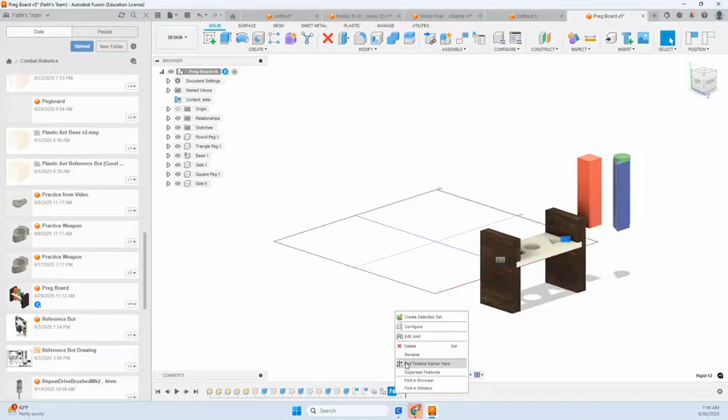So I have here my parts: my base, my square peg, my triangle peg, my round peg. I'm going to delete this so you can see me make the second side. I want to make sure that my base is grounded. If I right click, it should say ground to parent, but I don't want to unground it. I want it to stay grounded, so that means it's not moving.

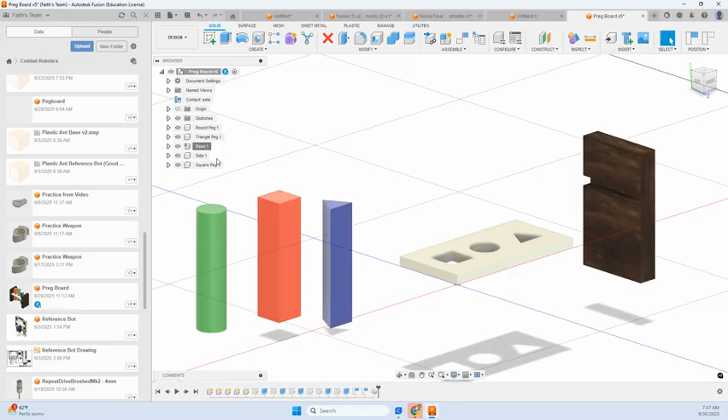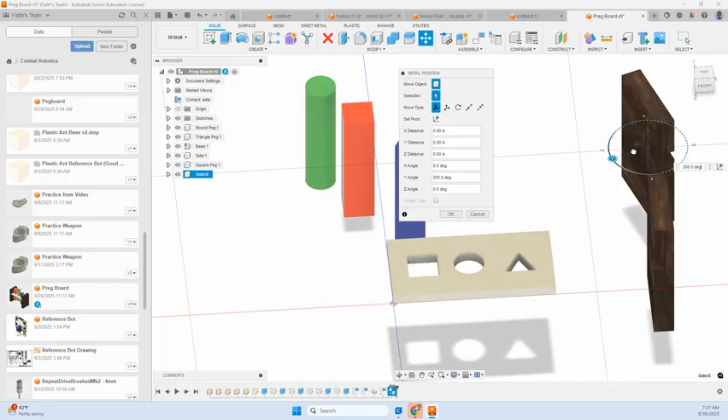I'm going to make a copy of this side by right clicking, copy, and then right click, paste, capture position. Then I'm going to move this over, and then rotate it 180 so it's the right direction. Okay, so now I have this part and that part, the two sides.

So I want to do a rigid joint so that this is permanently attached without moving. In the assemble menu, here's the joints. I'm going to click joint, and in motion, I want it to be rigid.

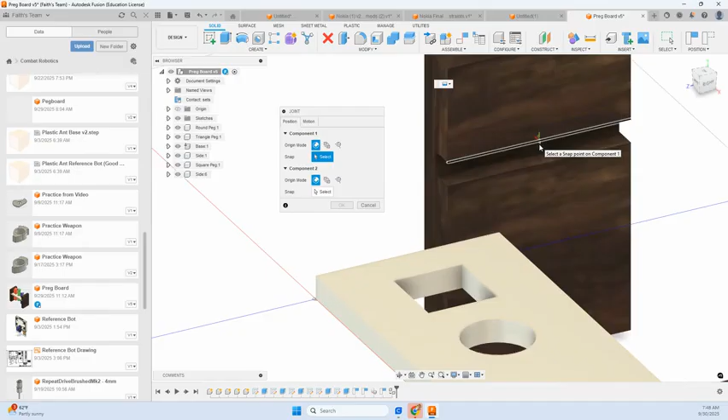I'm going to go into this, but I might need to rotate around so it's right in the middle on this inside part. Can you tell which part I'm in? Right there, see that it's like the back of that slot where it's going to sit. Then I'm going to click, select the second one, which is right here.

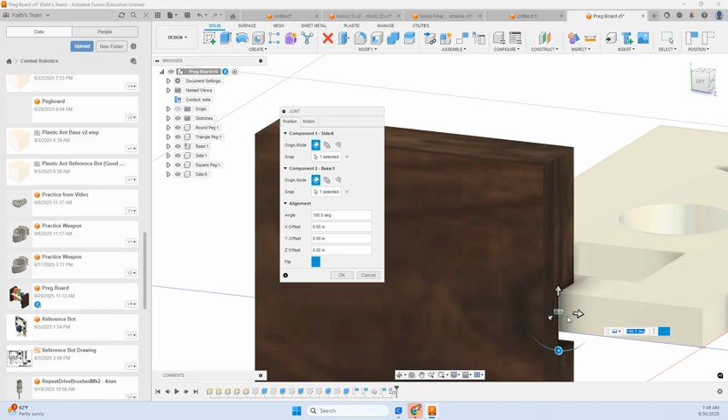No, that didn't work. Let me try that again. So I'm going to do assemble, joint, and I want the middle of this and the middle of this side. There, just make sure you select the middle of each so it's in the right spot. Notice it's rigid, so it won't move. I'll push OK.

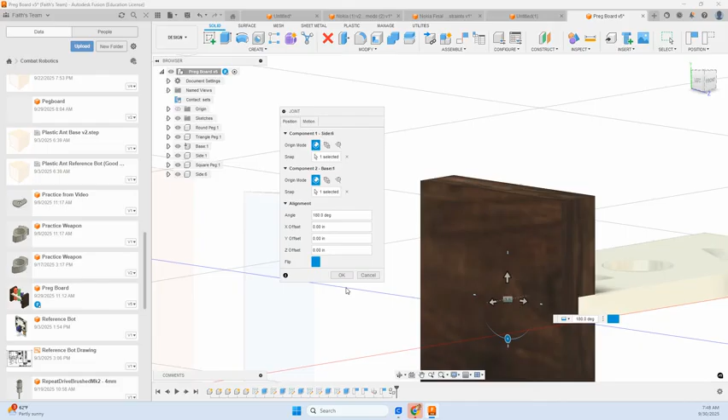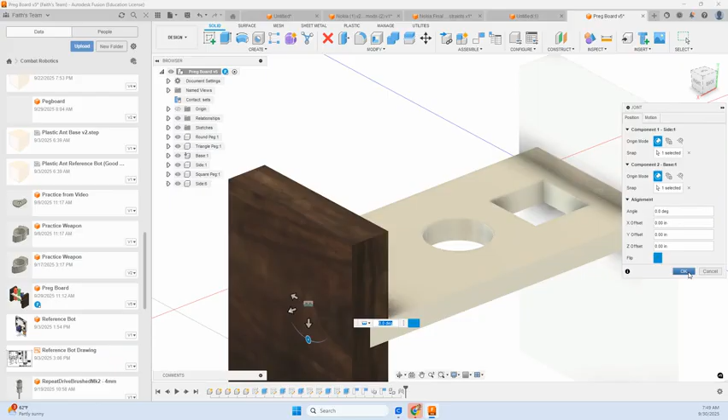Then I'm going to do another joint, assemble joint. Nope, that's not right. So I'm going to select the same spot on this one, and then this other side of the side right here. Okay, so now those are permanently attached.

Now I want to put this in the slot and make it go up and down. Let's do triangle first. I'm going to go from this view. So triangle, rectangle, circle. I'm going to go assemble joint, but this time I'm going to do slider.

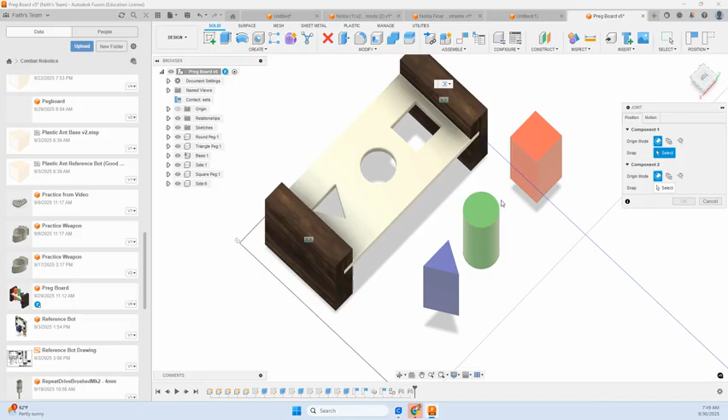I'm going to first select the edges I want to connect. I want to connect the top edge of this to this edge here. I'm going to click this and this. Now I'm going to go to motion, and you can see what the motion is.

So that doesn't look right. I'm going to switch the axis, maybe this one. Yep. So you can also limit the min and max of it.

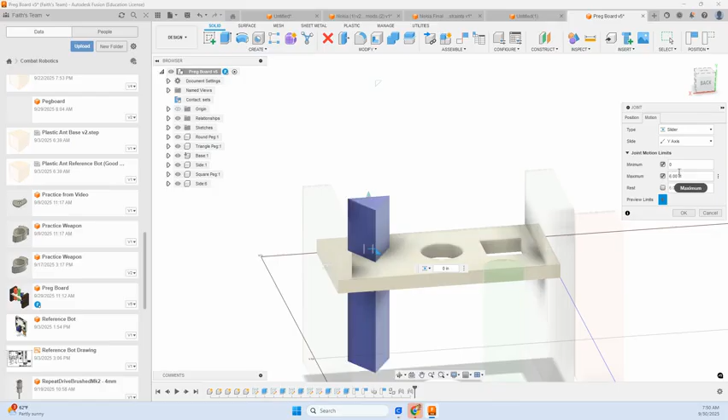Minimum, I'm going to do minimum 0, maximum 6. Let's see how that goes. So mess around with the numbers here. This has to be smaller than this number. And now notice it won't come out of the slot. So that is that joint. I'm going to push OK. And now it stays in that spot.

Do the same thing with the circle. Assemble joint. This time I'm going to select the circle here at the top. I'm going to select the circle. And then it goes in, and that's going the correct direction.

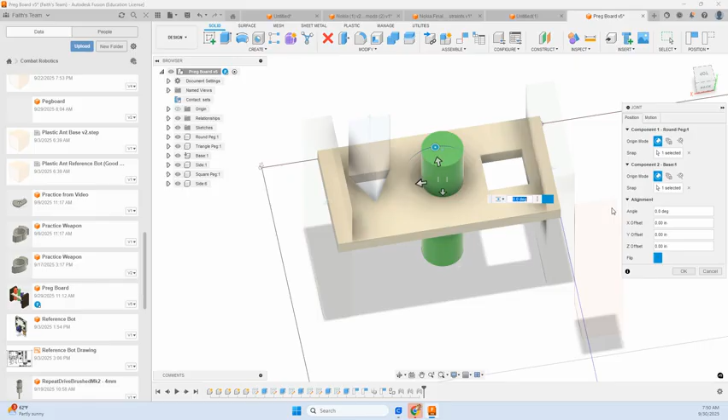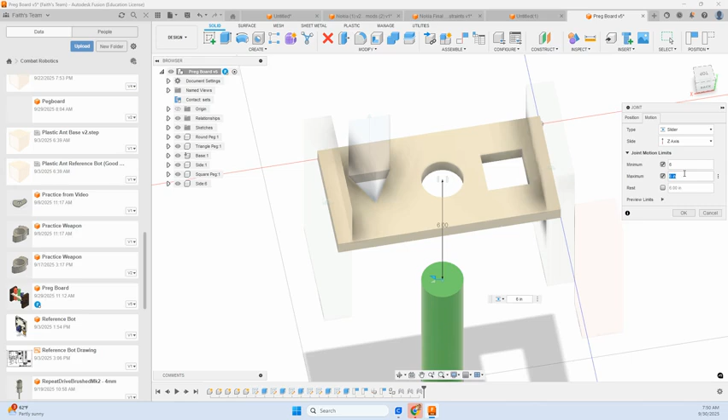Then in motion, I'm going to put a minimum or a maximum of 6. Let's see if that works. Nope. So I need to go minimum of 6, maximum, oh wait, no. Minimum of -6, maybe it's -6 and 0. Let's see if that is good.

It kind of depends on where you connected to originally, so you can just mess around with the min and max until it looks good. Boop, boop, boop, so that goes in and out.

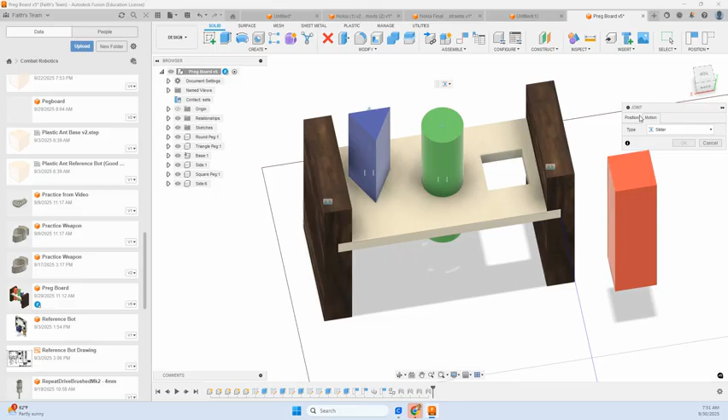And now the last one is my square. So I'm going to do a joint. Motion is still slider. I'm going to click this. I'm going to move this over. Cancel, I'm going to move this so you can see it better.

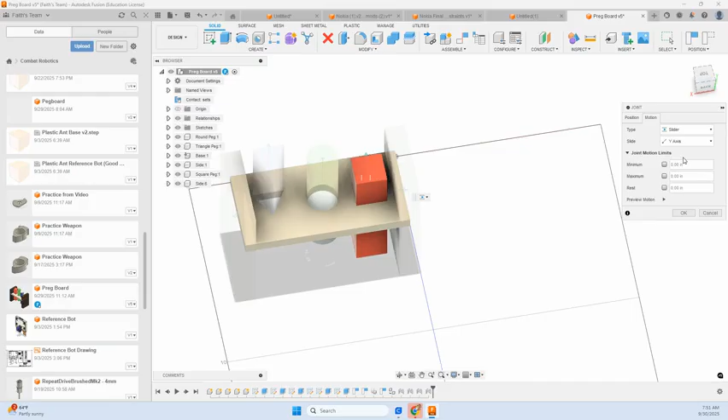All right, so I'm going to go assemble joint. I'm going to click the side of the square and the side of the slot. Notice that's the wrong motion, so I'm going to go back to motion. I'm going to choose Y. That's good. Then notice when it does the preview that it goes low.

So let's do maximum 6. Good. All right, that looks good. Okay, so that's it. Mess around with the min and max.

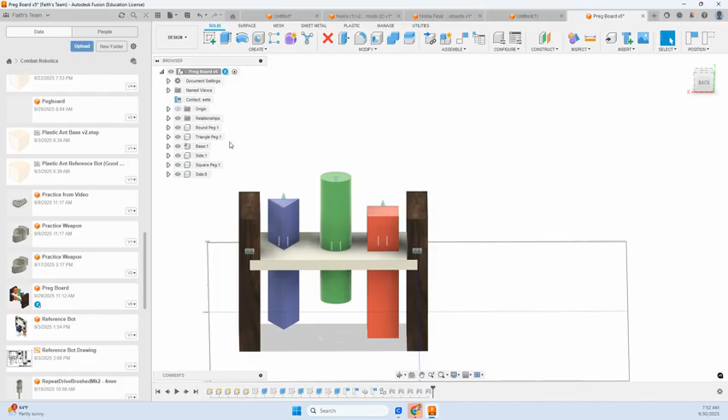If two parts are moving together, most likely they somehow got nested into each other, so make sure each of the parts is separately listed underneath the main board. And make sure that in your original product there's no sketches. This shouldn't be a sketch right here, so there shouldn't be any sketches under your original thing. There should just be round pegs, triangle peg, base, side, square peg, side. You can call it left side, right side, or right side, left side, whatever. So that's that. Let me know if you have questions.